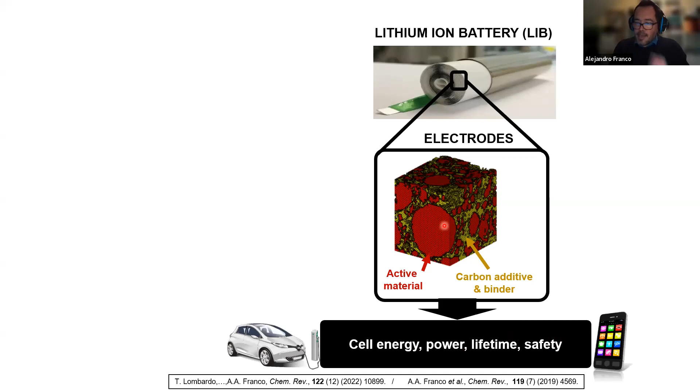We should highlight here that the electrode microstructure is strongly determined by the manufacturing process of the electrodes and of the cells. And the manufacturing process of the electrodes and cells is very complex because it involves multiple steps and multiple parameters, which are very difficult to tune, right?

And the consequence of this complexity is that we used to face high trial and high scrap rates, right? Which are actually around 5% for battery production and 30% in prototyping, when we are intending to prototype lithium-ion battery cells before going to production. And this is because usually this battery manufacturing process is optimized based on trial and error approaches, which of course are very time consuming and very costly, right?

This is why the concept of digital twin is emerging very strongly, in particular here in Europe since some years. And the idea here is having digital twin working hand in hand with the real machines manufacturing the lithium-ion battery electrodes and cells. So this digital twin is a digital copy, it's a copy in the computer of the real process. And the idea is that we have sensors in the real machines fabricating electrodes and cells, collecting data, for instance, measuring the thickness of the electrode being produced.

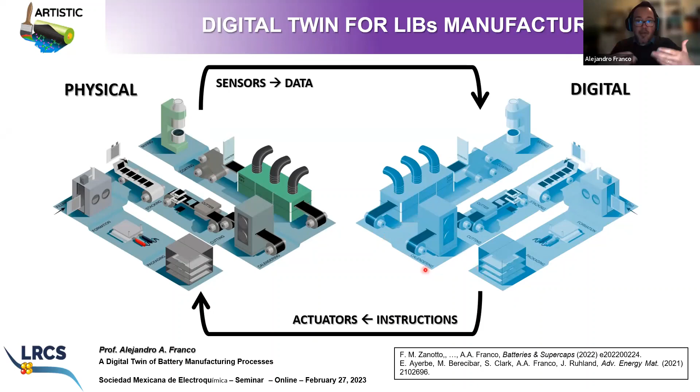This data is being sent into the digital twin where the data is being processed. And then instructions are being provided via actuators to the machines in order to allow them to fine-tune the parameters in an autonomous way and to produce electrodes with the desired thickness or the desired quality, right? In order to avoid, for instance, the formation of cracks upon the drying of the slurry, leading to the formation of electrode. So the idea then is having this digital twin working hand in hand with this real manufacturing process.

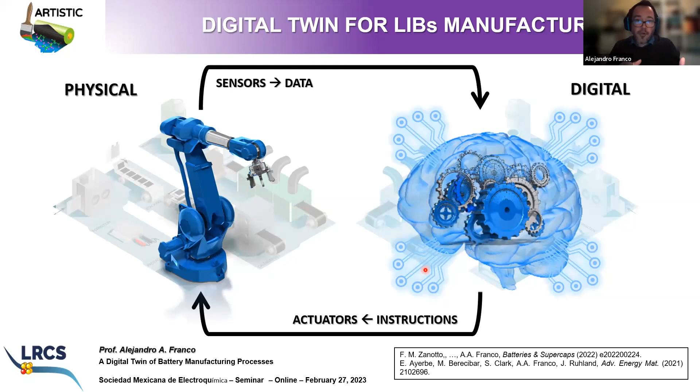So it's basically like if the real manufacturing machines are robots and the digital twin is the brain of these robots, right? So in the context of the development of a digital twin, we could wonder if a digital twin then is a kind of real copy, actual copy or detailed copy of the real machines that we have in a prototyping line or in a production line of lithium-ion battery cells. We could imagine doing so. We could imagine programming in the computer a 3D representation which looks very similar to the real machine geometry, functionalities, and so on and so forth.

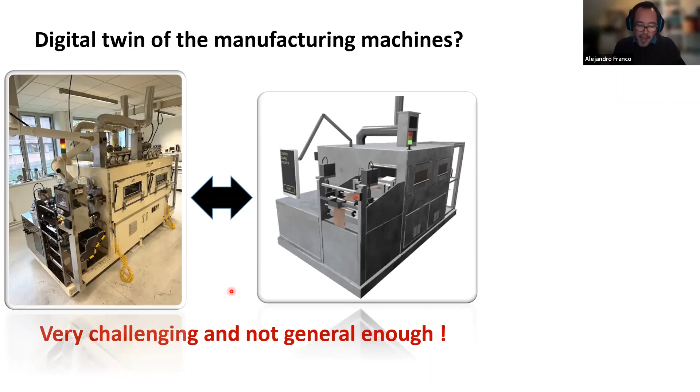Well, this kind of approach is very challenging and is not generic because, first of all, to describe in an extremely similar way a real machine using a computer, it's probably impossible because in a machine there are a lot of details going on. And in other words, it's very challenging because the approach is not generic, because you can imagine that we have different machine providers depending on the different labs, depending on the battery producers, and so on and so forth. This is why in the context of my research, we are developing machine agnostic process models.

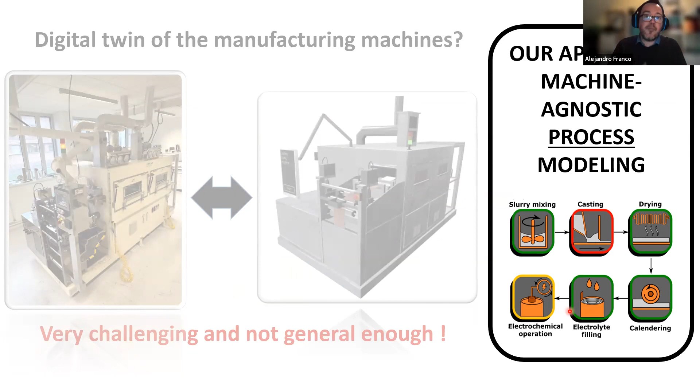So we are developing models which are in the brain of this digital twin, which are able to predict how manufacturing parameters all along the manufacturing process are going to impact the electrode microstructure and the cell properties in terms, for instance, of performance, right? So what we are doing in my group is modeling of the manufacturing process and not modeling of the machines producing the electrodes, producing the cells, okay? And we are doing this work in the context of the ARTISTIC project that I introduced at the very beginning. I was introduced by Luis.

And in this project, what we are doing is we are developing two types of models, which are actually the brain of the digital twin. So one type of models is this so-called physics-based process modeling, where we are describing the physics going on all along each step of the manufacturing process and dealing with the formation of electrodes and dealing with the performance of the cell. And also we are developing machine learning models, which are very useful to unravel correlations between electrode properties and manufacturing parameters. And we are feeding into these models experimental data being collected in the pilot line that we have in our laboratory.

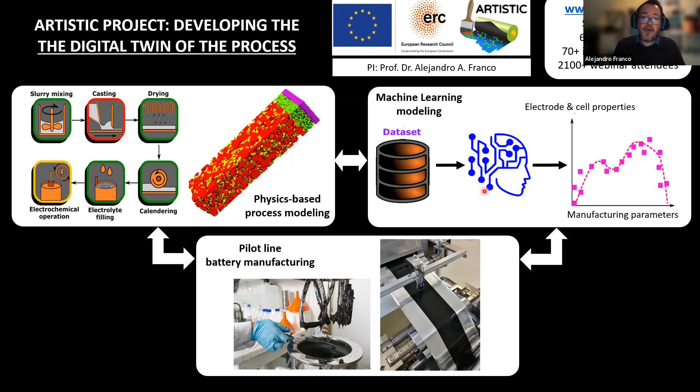So we have a pilot line mimicking how we manufacture lithium-ion battery cells in industry at a reduced scale, right? Thanks to this pilot line, we can generate a lot of data about the influence of manufacturing parameters on electrode and cell properties. And then we use this data in order to validate the physics-based models, but also in order to feed with data the machine learning pipelines revealing correlations between manufacturing parameters and electrode and cell properties.

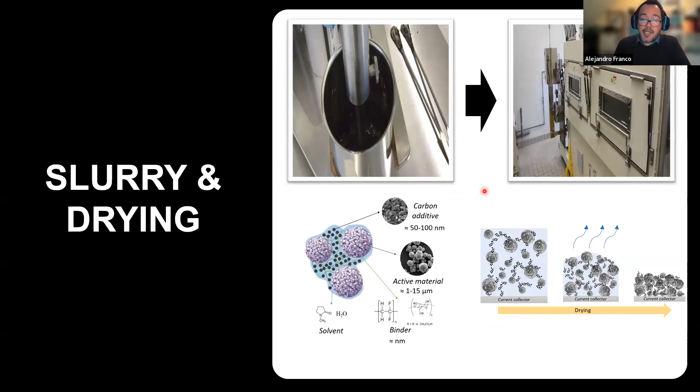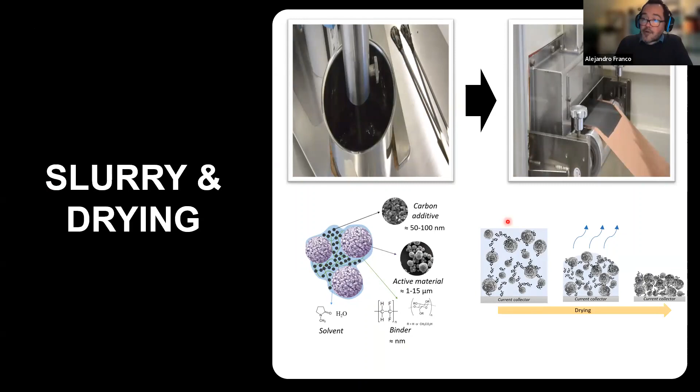I'm going to show you examples of what we are doing for each of the steps of the manufacturing process. And the very first step is the electrode slurry and the drying of this slurry, which is going to deal with the formation of the electrode, right? When you pass the slurry through the oven. So in order to model the slurry by using the physics-based approach, because once again, in the ARTISTIC project, we are developing physics-based models and machine learning models.

So if we speak about the physics-based models, we model with this physics-based approach the slurry in the following way. So we imagine the slurry to be composed of a composition of different particles. Some of these particles will represent the active material particles, NMC 111, for instance, here. Other particles will be fictitious particles representing aggregates of carbon additive particles, binder and solvent. And then we are going to describe interaction forces between these different types of particles.

These forces can be attractive or repulsive, or we can consider both, having at the same time attractive and repulsive forces. Then we implement the mathematical expressions of these forces into Newton equations, and we solve, in a classical MD-like, molecular dynamics-like framework, in order to calculate the acceleration of these particles, and then by integrating the acceleration, we can calculate the speed and the position of the particles.

And by tracking the evolution of the energy, when you describe the interaction between these particles in this simulated slurry, you will be able at the end to converge to a global energy minimum, which will actually correspond to the equilibrium state of the slurry, which will represent the digital twin of the slurry in 3D. This digital twin of the slurry is in periodic boundary conditions.

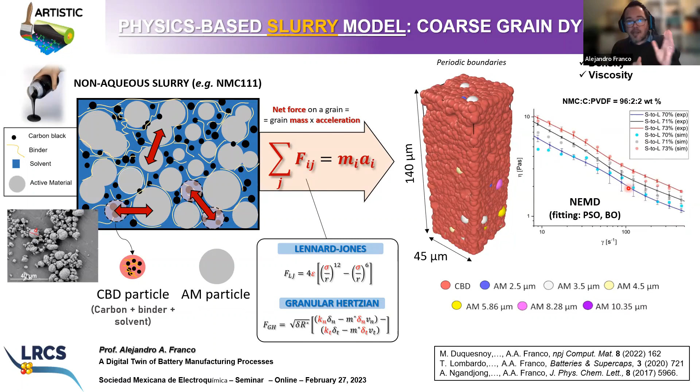In order to do so, we fit the density values that we calculate with experimental ones, and we also fit the viscosity values that we calculate for different shear rates with experimental ones for different slurry formulations, different solid contents. And in order to fit the parameters, we adopt a combination of optimization techniques, combining in particular two techniques, particle swarm optimization and Bayesian optimization, but also machine learning.

We published last year a paper where we report a machine learning pipeline which is able to predict the results of these physics-based simulations in terms of viscosity and density before the physics-based simulation finishes. In such a way, we can predict the results of the physics-based simulation without the need of running it until the end, knowing that a physics-based simulation like this can be very time-consuming.

Thanks to this machine learning model, we can accelerate the optimization of the parameters that we need to put in the force field in order to match correctly the viscosity and the density values from experiments. I'm not going to discuss this slide in more detail, which is very technical. It relates a lot to machine learning in particular. So if you have questions, of course, I will be happy to discuss this in more detail.

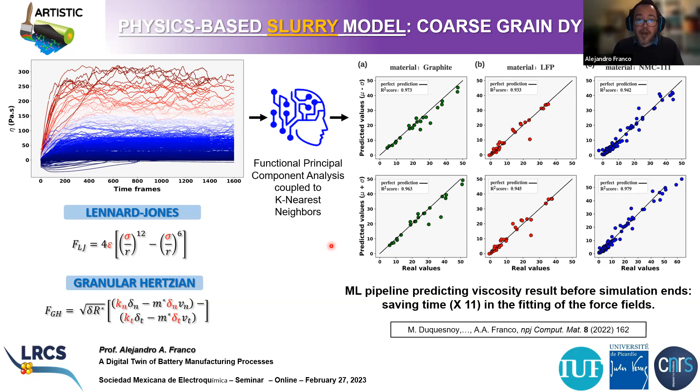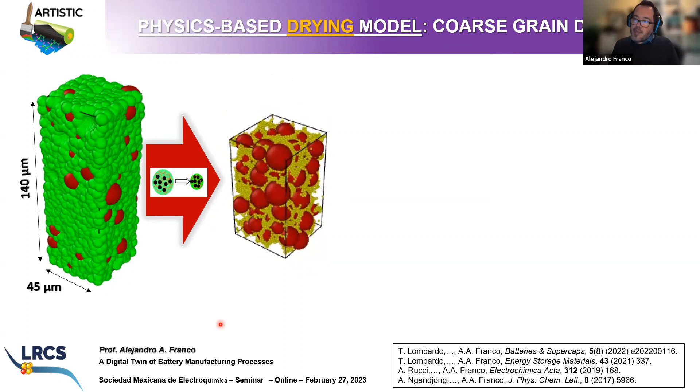These green particles representing the CBD are now represented in yellow. Then we run the MD-like, molecular dynamics-like framework again by solving Newton equations, once again describing the interaction forces between the particles, and we converge to a new equilibrium state, which will represent the dry electrode microstructure, where you see in yellow the carbon binder domain, in this case not containing any more solvent. It contains just carbon additive particles and binder, and you see in red the active material particles with different sizes.

This virtual representation of the electrode, the digital twin of the dry electrode, can be characterized in the computer in terms of properties that we can measure at the experimental level. For instance, the porosity of the electrode and the tortuosity factor of the electrode. But we can also characterize other properties such as the electronic conductivity of the electrode, and so on and so forth.

So I would like to highlight, here you see this paper, Journal of Physical Chemistry Letters in 2017. This is a paper that we jointly published with Jorge Vázquez Arenas, who is present in the audience and who is organizing this event. We hosted Jorge for 3 months, and we had a very nice collaboration. He was in charge of modeling the electrochemical performance of this electrode being generated by this simulator of the manufacturing process.

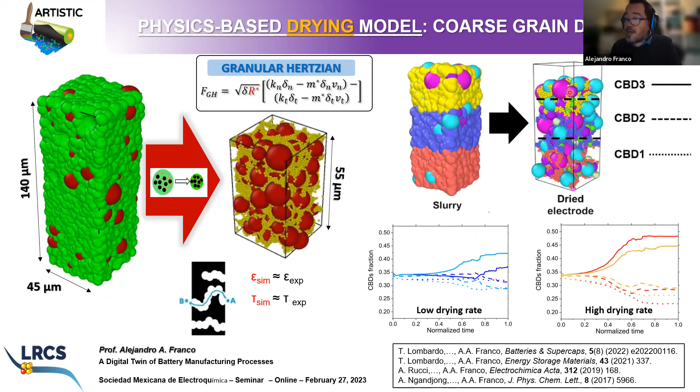And since then, we have also had a lot of progress in the methodology. One of these is that now we are able to simulate the impact of the drying rate on the electrode microstructure in order to capture the influence of drying rate on the CBD migration phenomenon, which is widely known in battery manufacturing. When you dry the slurry too fast, what you observe experimentally is a lot of carbon binder domain going on top of the electrode. This will be a problem because you will have an isolating layer between the electrode and the separator that I'm going to put on top of this electrode.

Here, the simulations are performed by shrinking the CBD at different rates, depending on whether you are talking about the CBD near the current collector or the CBD in contact with air. CBD here stands, at the slurry phase, for carbon binder containing a solvent domain. By playing with the rates of shrinkage of these CBDs at different zones, you can converge to electrode microstructures with carbon binder domain with different repartitions along the electrode thickness. In particular, if you apply high drying rates, you will start to see gradients of CBD content along the electrode thickness, in good agreement with what we find at the experimental level.

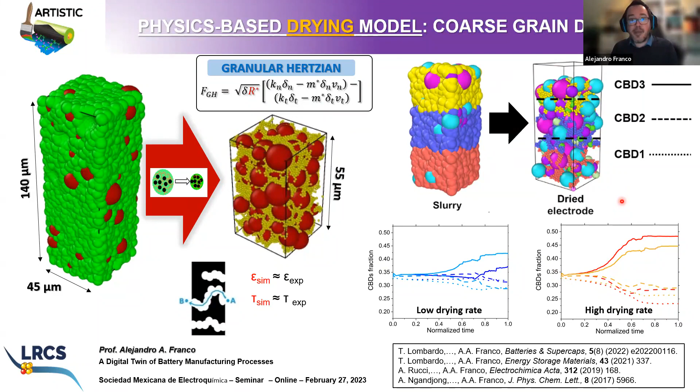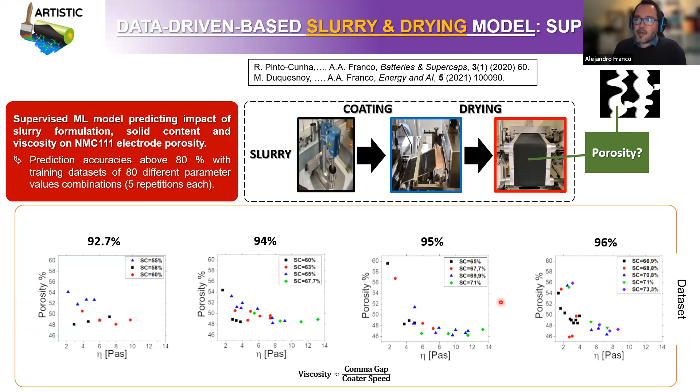Here you see how the porosity of the electrode depends on the viscosity, the solid content, and the slurry formulation. This is the weight percentage of NMC 111 in the slurry. You see that this collection of points is very scattered. It's very difficult from this graph to unravel any correlation between these 3 input variables and the output variable, the porosity of the electrode. If you apply supervised machine learning, in particular a technique called support vector machine, you can transform this scattered collection of points into something more understandable by humans: phase diagrams, exactly like in crystallography, but here for manufacturing processes.

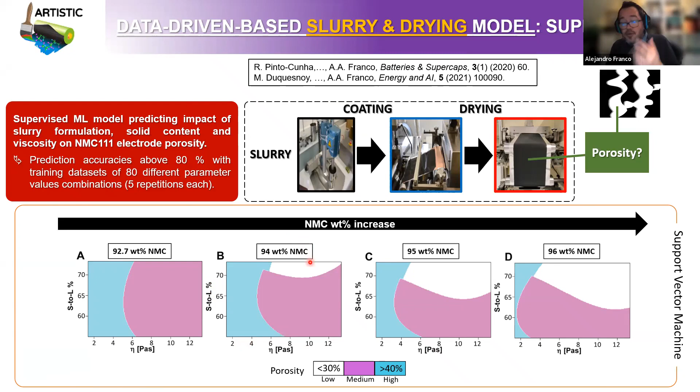Once again, this type of graph is very useful, in particular for technicians and engineers working in pilot lines and prototyping lines of batteries, because very quickly, thanks to these phase diagrams, they can decide which slurry viscosity they need, connected to the coating speed and the comma gap in the coater, and which solid content and formulation they need in the slurry to get electrodes with the desired porosity.

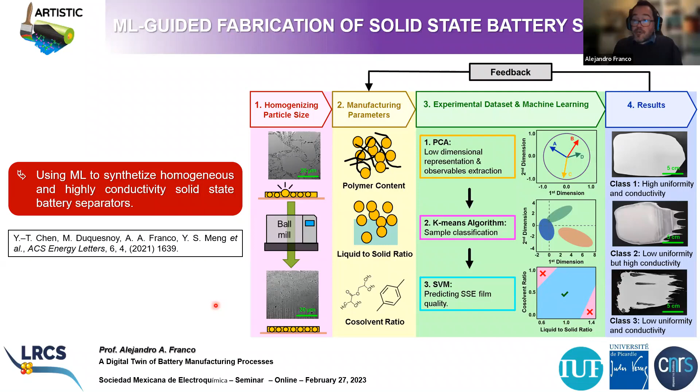Let me move now forward to the next step of the manufacturing process of lithium-ion batteries. Here I'm coming back to lithium-ion batteries. And the next step is, of course, the calendaring. The calendaring consists of pressing the electrodes in order to improve the electronic contact between the particles. We need to press the electrodes to improve electronic contact, but at the same time, we need to avoid the pores inside the electrodes being fully collapsed, because if these pores become fully collapsed, then the liquid electrolyte that you need in order to exchange lithium ions properly between the two electrodes is not going to wet the porosity properly.

This is a very complex process step because in a calendaring machine, you can control basically three types of parameters. You can control the gap between the rolls pressing the electrodes. This gap is related to the pressure that you apply to the electrodes. You can control the speed of the rolls, and you can also control the temperature of the rolls. These three parameters are going to impact the final electrode microstructure upon calendaring.

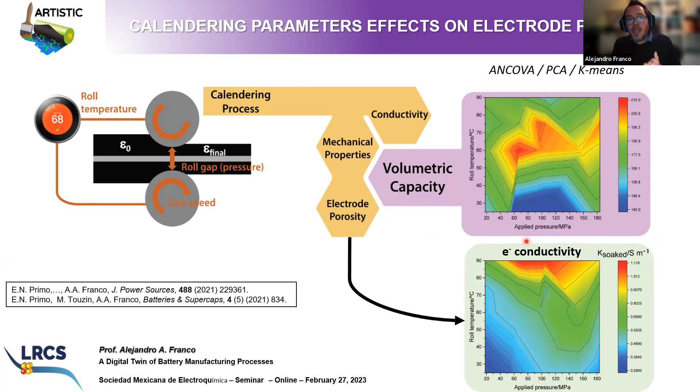And you see the influence of the same parameters on the electronic conductivity of these electrodes. There is also another axis, which is the roll speed, which is not represented here in this graph. But this is just to show you how complex the impact of these manufacturing parameters of the calendaring step can be on the final electrode properties that you get upon calendaring.

And you see that when you compress the electrode, there is a plastic deformation, but also there is a little bit of elastic recovery. This is a phenomenon called the spring back phenomenon in the battery manufacturing field, which is widely known, in particular in industry, and it's very difficult to optimize. The model is able to predict the influence of calendaring on the plastic deformation, and is also able to predict the influence of calendaring on the elastic recovery or spring back phenomenon. The microstructure of the electrode being used for simulating this calendaring step is the one arising from the drying simulator. You see all these models are connected sequentially.

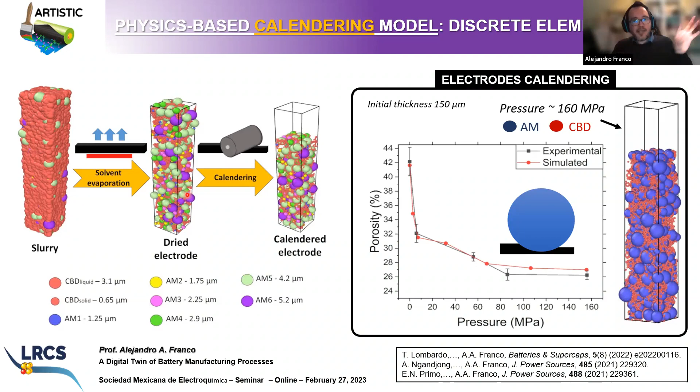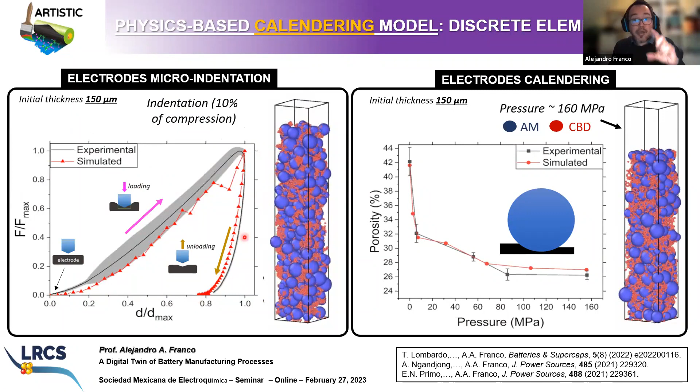And another point which is very important to highlight is that the parameters in these models are being determined by fitting the microindentation characterizations that we have performed in collaboration with the University of Lille, which is near the city of Amiens, the city where my lab is located. In this microindentation experiment, you basically use an indenter to go into an electrode, and then you measure the resistive force of the electrode towards this indenter.

And then you can simulate this by using this method, and then by comparing results from the model with the experiment, you can calibrate the parameters that you need to put in the interaction forces describing the interaction between these particles upon calendaring.

And also we have calibrated these parameters simultaneously to compaction curves. In a compaction curve, we represent the influence of the calendaring pressure on the electrode porosity. And you see here also a very good fitting with the experimental compaction curve.

We have recently extended this model. This is a paper published very recently this year, to the case of having non-spherical active material particles. Because probably you noticed that all the simulations I showed you so far with the physics-based approach are considering active material particles as spheres, right?

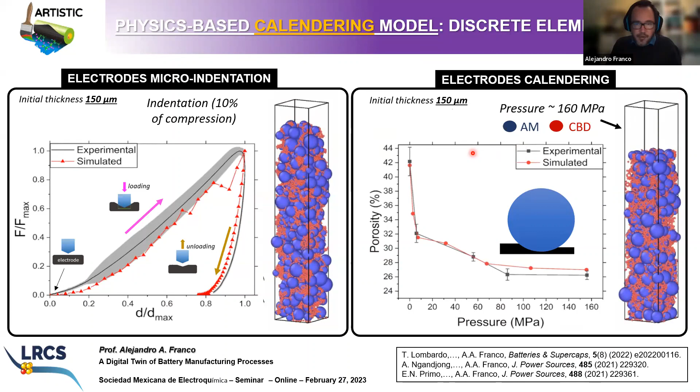This could be a quite good approximation for active materials such as NMC111. But if you start to look in detail at the particle morphologies, you don't have spheres, right? You have things like that, which could be represented eventually as spheres, but they are not really spheres. So in order to be able to simulate systems where the hypothesis of the spherical particle is very far away from reality,

we have characterized electrode microstructures before and after calendaring using micro-CT, micro-computed tomography. In such a way, we can extract families of particle morphologies. And then in each of these particle morphologies, we embed a collection of spherical primary particles, reproducing the overall morphology of a secondary particle. And then we apply the same MD-like framework I described before.

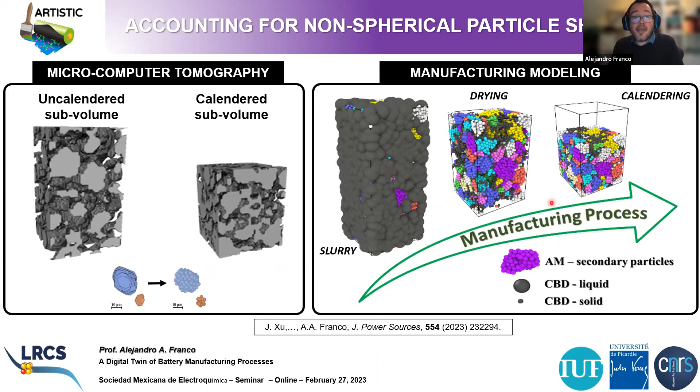That means we account for interaction forces between primary particles with different magnitudes for the primary particles belonging to the same secondary particle versus the case where these primary particles belong to different secondary particles. In such a way, we can simulate the entire manufacturing process, the slurry, the drying, the calendaring, by using non-spherical particles.

And here I'm going to show you a couple of examples of what you can get with these more sophisticated models. For instance, you can predict the influence of calendaring on the electrode microstructure, and you can account for the deformation of the active material particles because of the calendaring process parameters, the compression degree, the temperature, and so on.

This is a paper that is right now under preparation and hopefully will come out soon. It's an extension of this model, which is able to predict under which calendaring conditions the active material particles are going to crack. And this is also a problem in terms of manufacturing electrodes in industry: how to optimize the calendaring process in a way that you have good electronic percolation between the particles, you don't collapse the pores, and at the same time you don't crack the active material particles.

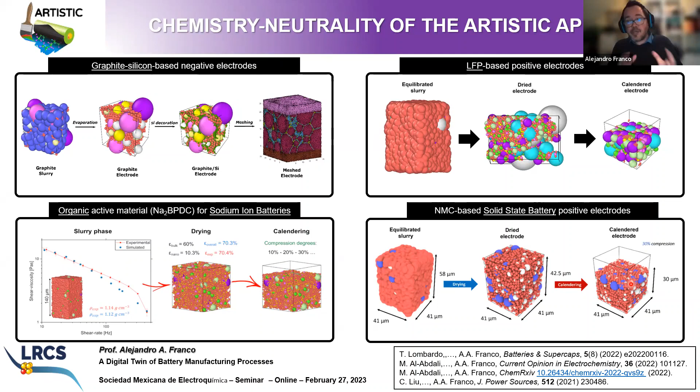You can address also the calendering by using machine learning, okay? And here I'm going to illustrate an example of application. It's a collection of papers that we published in 2020-2021. It's in particular based on the SISSO method, which is a method I really recommend. It's actually a method which is trained with data, right? And which derives algebraic equations relating input variables with output variables, okay?

I think it's a very cool method to derive formulas, right? Mathematical formulas that you can then apply for predicting, for instance, the influence of calendering pressure and calendering temperature on the final electrode porosity, right? Here you see a demonstration of this application in the context of calendering.

We have first built a data set where you have as an output the porosity of the electrode after calendering, and as an input you have the formulation of the electrode, which is the active material content in weight percentage, the porosity of the electrode before calendering, the thickness of the electrode before calendering, and the calendering pressure. These are the four input variables, while the output variable is the porosity of the electrode.

Thanks to this data set, we have derived a correlation function, okay? This is a kind of fitting, relating the porosity of the electrode as a function of these four input variables. And then we have used this correlation function in order to generate a lot of electrode microstructures in 3D. So we have generated a bit more than 4,500 electrodes. This generation of electrodes was performed by using a stochastic approach.

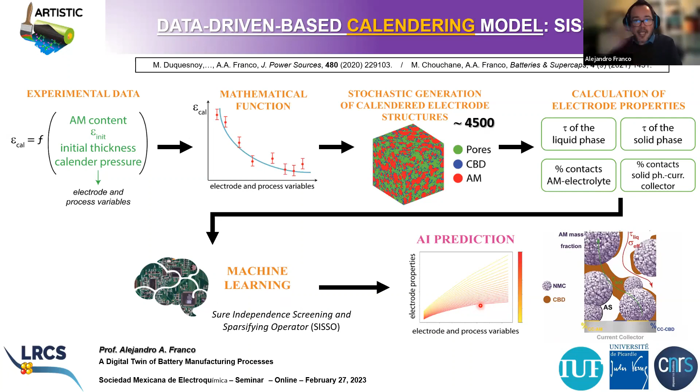Based on this data set, where you have as an input these four parameters and as an output all the collection of parameters that you can imagine for an electrode microstructure, we have trained this SISSO-based machine learning model in order to perform regression, okay, in order to predict numbers. And here I'm going to show you an example of what you can get with this technique.

You can predict the influence of calendering pressure, the initial porosity of the electrode, and the formulation of the electrode, each curve here with a different color corresponds to a different formulation, on the tortuosity factor that you will get in your electrode upon calendering. You see that when you increase the calendering pressure, the tortuosity factor increases in these four cases. This is expected because the electrode is becoming more and more compact, the pore network is becoming more and more tortuous. But the nice thing with this method is that you can quantify the degree of impact.

And you can also see that the degree of impact of the calendering pressure on the final tortuosity of the electrode depends on the initial porosity of the electrode, I mean the porosity the electrode has before the calendering, and also depends on the electrode formulation, right? And I believe, once again, that this kind of result arising from machine learning can be very useful for guiding technicians and engineers working in prototyping lines and in pilot lines before the production of lithium-ion battery cells.

With these techniques, you can also perform some correlation analysis, and here you can build this kind of graph that I believe is very, very useful and interesting. Here you see the influence of these 4 input parameters that we have explored in this study, and here you see the output parameters, right?

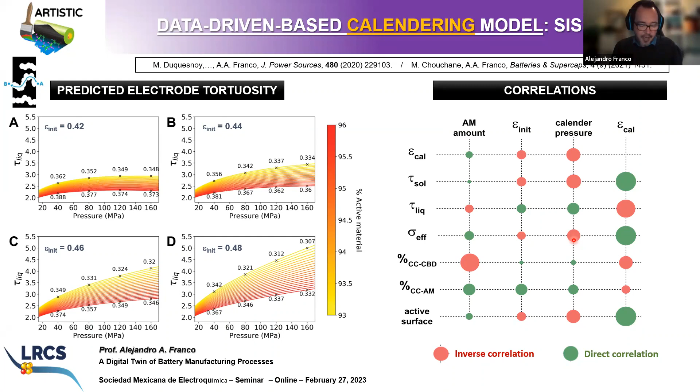Once again, this kind of graph can be very useful also for guidance, right? Because very quickly you can already have an overview of how the input parameters impact the outputs. And I believe this can be transferred to any kind of problem, in particular in electrochemistry, beyond the field of lithium-ion batteries.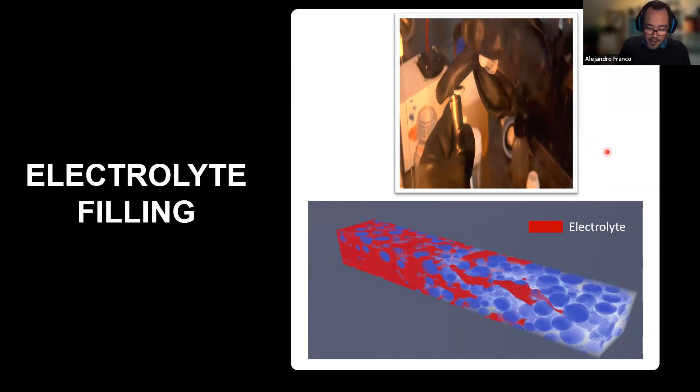The next step in the manufacturing process simulation is considering the electrolyte filling, okay? So you see here a cylindrical lithium-ion battery cell, as you have in the Tesla cars, being filled with a liquid electrolyte in a glove box. This is a process which is very difficult actually to optimize at experimental level, because, as we will see in a minute, it's a very complex process, right?

Here you see simulations that we have performed by using the lattice-Boltzmann method to predict the trajectory of the electrolyte when it's infiltrating electrodes, an uncalendered electrode and a calendered electrode. I will play the video again: you see how fast is the infiltration of an uncalendered electrode, and how slow is the infiltration by liquid electrolyte of a calendered electrode.

The reason is that a calendered electrode has higher tortuosity factors. Porosity is lower, tortuosity factor is higher. Therefore, there is a more intricate path for the liquid electrolyte to go into the pore network. While for an uncalendered electrode, porosity is higher, tortuosity factor is lower, so it's easier for the liquid electrolyte to go and fill the pores, right?

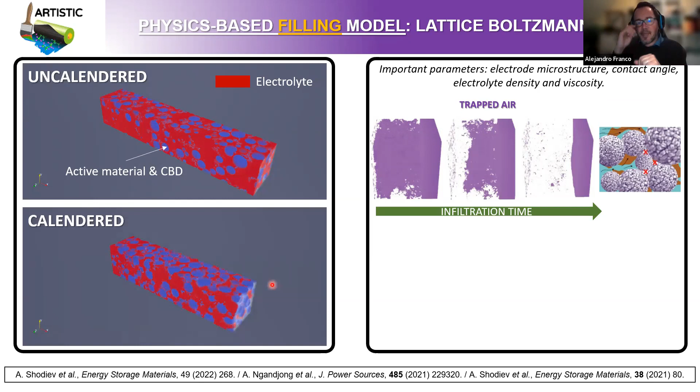So this is highlighting that there is a trade-off between the manufacturing process step calendering and the step electrolyte infiltration, because in the calendering, you need to compress the electrode in order to improve the electronic contact between the particles. But in electrolyte infiltration, it would be better to have high porosity, right? But if you compress the electrode, you will have lower porosity, you see? So it's very important to optimize both steps by considering both of them.

That's why this kind of modeling workflow, where we intend to couple different model tools sequentially, is very useful, because you can reveal this kind of correlations between different process steps. Here you see results from this lattice-Boltzmann method simulation. This is the predicted spatial distribution of trapped air in the electrode porosity. You see here a lot of air bubbles which remain inside the electrode volume after the electrolyte infiltration.

And this is, of course, problematic because if you have air instead of liquid electrolyte, then your active material is not going to be fully active upon lithiation or delithiation, which is an electrochemical process. You need lithium ions to arrive to the surface of the active material. If you have air, the lithium ion is not going to arrive to the active material, and then you will lose performance for your lithium-ion battery cell. You will lose energy density, you will lose power density, right?

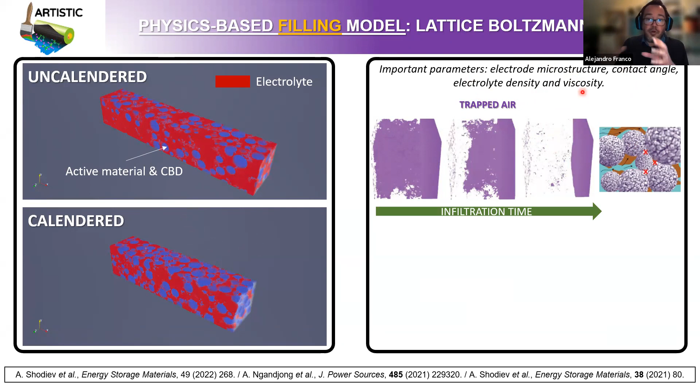This phenomenon is strongly dependent on the electrode microstructure, as we saw here, but also strongly dependent on the contact angle between the liquid electrolyte and the electrode. It's also dependent on the electrolyte density and the electrolyte viscosity. And these properties can be controlled by playing with the chemical composition of the electrolyte.

Okay. Here you see a result of simulation showing how heterogeneous the infiltration by liquid electrolyte of a cell sandwich can be. This is a simulation also in 3D, but here I'm showing a side view. In the anode, you have a graphite-based electrode.

You have an NMC111-based electrode in the cathode side. In the middle, you have a separator with a microstructure arising from tomography characterization. And these electrode microstructures were generated stochastically. And you see here how heterogeneous the infiltration process is if you put a drop of electrolyte on top, right? And this is because the porosities and the tortuosity factors of these three layers are different. This explains why it's so heterogeneous.

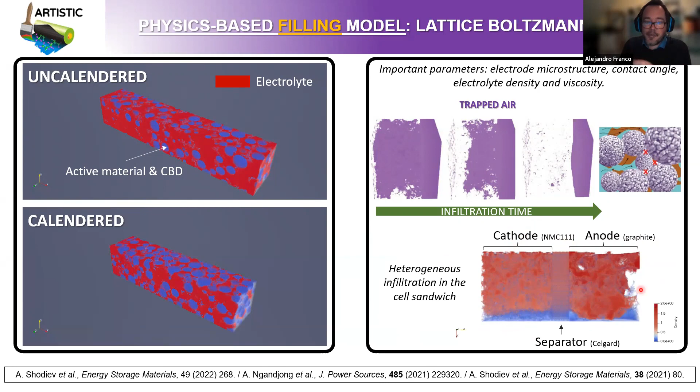And this also explains why it's so difficult to optimize this electrolyte infiltration process in industry, why it's so time consuming. The lattice-Boltzmann method that we have used to explore this infiltration process with physics-based simulations is computationally costly. To simulate the infiltration of a single electrode, it can take you 1 to 2 days of simulation time, depending also on the computational power that you have.

This is why we have derived, by using machine learning, a surrogate version of this lattice-Boltzmann method, which has the advantage of being able to simulate the infiltration process of electrodes in 3D by the liquid electrolyte in a few seconds instead of a couple of days. What we use as a training data set is the results arising from the lattice-Boltzmann method. And we have actually defined different descriptors.

For instance, the final saturation of each of the pores in a given microstructure, the time that the pore takes to be fully filled or partially filled, and so on. With this data set, we have trained a multi-layer perceptron model, which is nothing more than a kind of neural network model. Thanks to this model, we see very good prediction of the saturation curves calculated by the lattice-Boltzmann method

for different applied pressures. Also, thanks to this machine learning model, we can reconstruct in 3D the trajectory of the liquid electrolyte in the electrode volume, in good agreement with the lattice-Boltzmann method. So we believe this is very interesting because with much reduced computational power, you can predict the same results. And this paves the way towards high throughput screening of the influence of electrolyte properties and electrode microstructures on the speed and ease of the infiltration process.

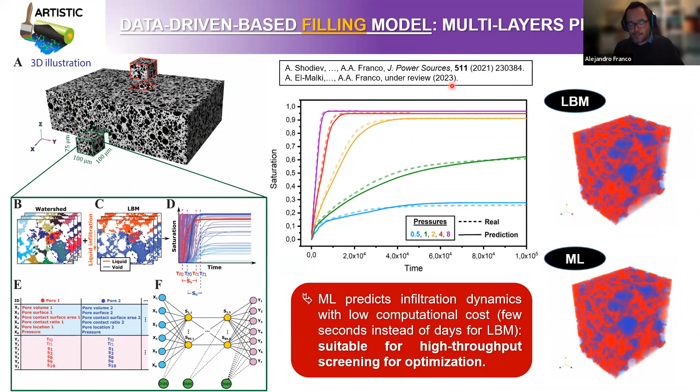This is a paper that we initially published in 2021, describing this method. And now we have a paper under review where we demonstrate the use of this method for high throughput screening of electrolyte chemistries and electrode microstructures in their ability to infiltrate the electrodes by the liquid electrolyte. Hopefully this paper will come out soon.

The last step to digitalize the battery manufacturing process is the simulation of the electrode and cell operation. Once we get these digital twins of the electrodes and the cells, we would like to know how they are going to behave when applied, for instance, in a mobile phone or in an electric car, which in my projects is more related to electric cars than to mobile phones.

In order to do so, we apply a technique called the finite element method. This is a model that we co-developed with Jorge Vázquez Arenas, as I mentioned before, in 2017, and then we improved it a lot with new functionalities. In particular, we improved it by considering explicitly the spatial location of the carbon binder domain in the electrode volume.

By meshing the electrode microstructures arising from the manufacturing simulation and implementing the physics going on when this electrode is operating in a lithium-ion battery cell being discharged and charged, we are able to predict the lithiation and delithiation dynamics in the 3D volumes, as a function of the C rate, which is related to the current density applied to the battery, and as a function of the temperature and other operation parameters.

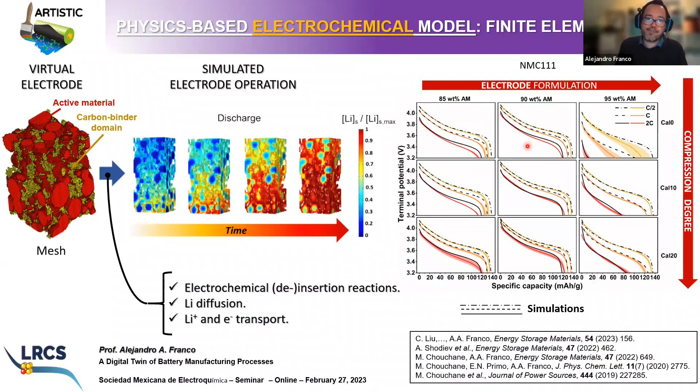Last but not least, we can wonder, can we use these tools for optimizing the manufacturing process? Because here I describe tools to predict the influence of manufacturing process on electrode and cell properties, but can we use these tools to predict which manufacturing parameters we need to adopt in order to have an optimized electrode, right? Well, the answer is yes, and this is also a paper that we published very recently this year in Energy Storage Materials. And here I'm showing this with an example.

We have actually performed design of synthetic experiments. That means that we are performing simulations by using the ARTISTIC physics-based modeling framework of the manufacturing process of NMC 111 electrodes by simulating the slurry, drying, and calendering for different ranges of formulations, solid contents, and compression degrees. So here we are playing with the formulation, solid content in slurry, and with the calendering degree in the calendering step, keeping constant the conditions for the drying step.

We have produced, based on that, a lot of electrodes that we have characterized in terms of properties such as conductivity, tortuosity, porosity, thickness, and so on. And then we have derived a machine learning model able to predict how these manufacturing parameter values are going to impact the final electrode properties upon manufacturing. This machine learning model has the advantage compared to the physics-based modeling that it is less computationally costly. In a few seconds, you can get your answer.

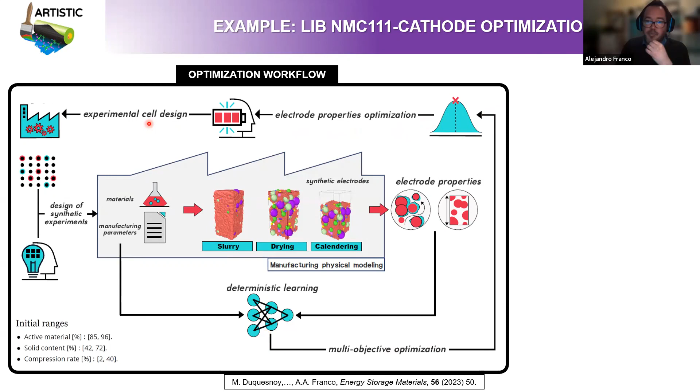And then we embed it in a multi-objective optimization algorithm based on Bayesian optimization technique in order to predict which are the parameters you need to adopt in the manufacturing process in order to reach electrodes with optimized properties. This is a detail of how we are actually designing these synthetic experiments. We use a technique called Sobol sequences. That means that these synthetic experimental points are taken randomly between these 3 variables that we have explored here: solid content of the slurry, formulation of the slurry, and compression degree upon calendering.

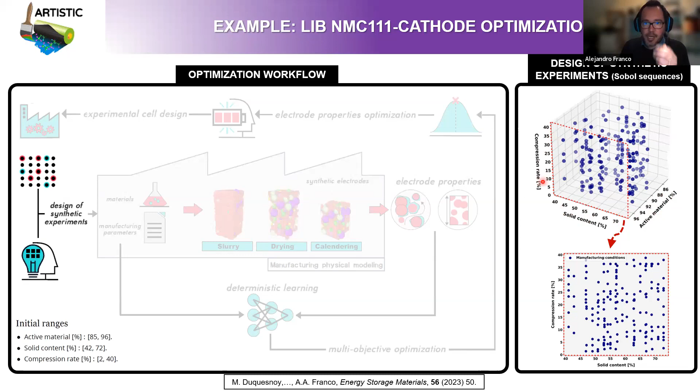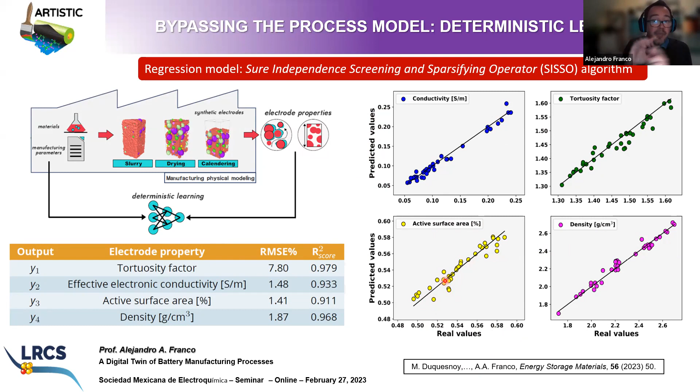These graphs are actually representing the same thing. Predicted values are the values predicted by the machine learning, and real values are the values predicted by the physics-based model. And the idea here is being as close as possible to this 45-degree line. If you are matching perfectly this line, that means that you have a machine learning model with accuracy 100%.

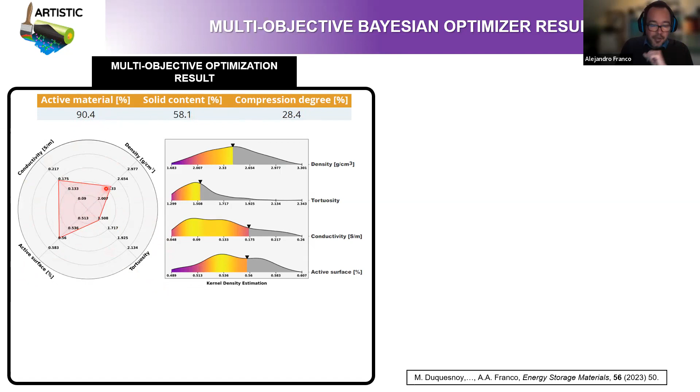And if you enter these manufacturing parameters in the ARTISTIC manufacturing simulator, and then you characterize the electrode properties of the resulting virtual electrode, you will realize that these properties match very well with the predictions of the Bayesian optimizer. So this is a way of validating the prediction of the Bayesian optimizer. And this is something that we have also performed at the experimental level. So we have checked that this electrode can be made at the experimental level by entering these manufacturing parameters predicted by this Bayesian optimizer.

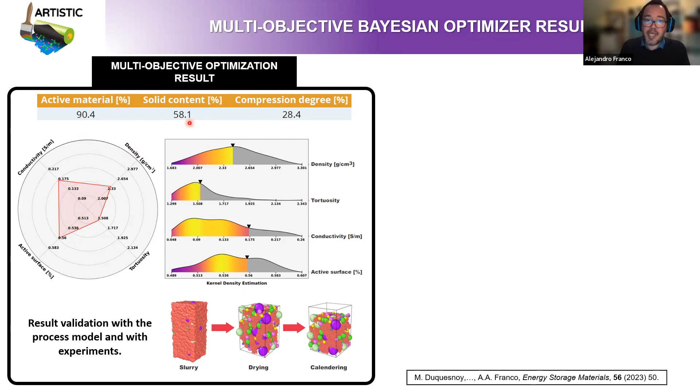and not only one single property, because if you intend to minimize the tortuosity factor of an electrode in order to improve the power density of your cell, maybe you will lose conductivity, right? You will have an electrode with very poor electronic percolation in the electrode volume.

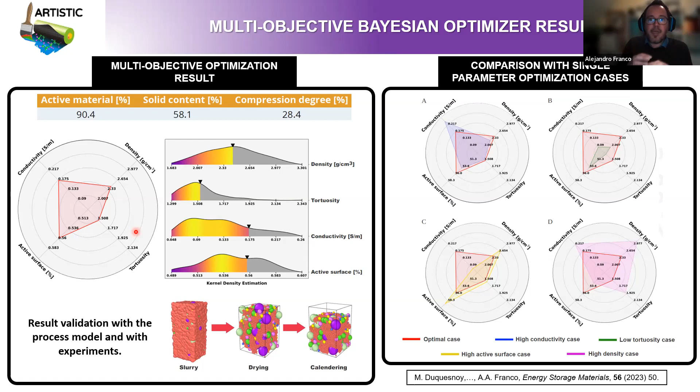So we believe that this is a nice demonstration of how we can use physics-based models combined with machine learning and Bayesian optimization in order to perform inverse design of the manufacturing process of lithium-ion battery electrodes. That means predicting which manufacturing parameters we need to adopt in order to get optimal electrodes.

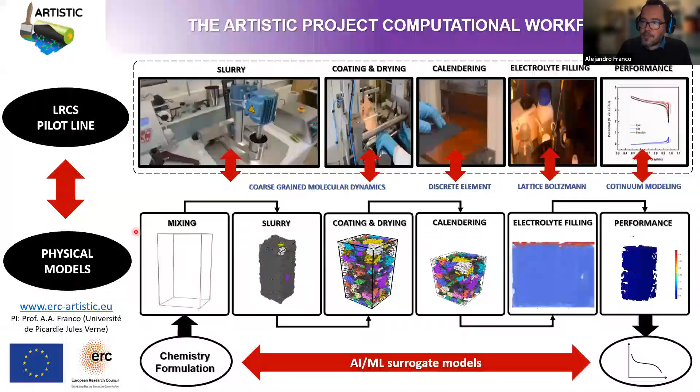Let me conclude now in 2 or 3 minutes. So this is the slide summarizing what I showed you today. We have a collection of physics-based models simulating each step of the manufacturing process, from the mixing, something that I didn't discuss today, but this is a paper coming out as well, until the performance. We have surrogate models based on machine learning, predicting also the influence of manufacturing parameters on electrode and cell properties.

And we feed into these digital workflows data coming from our experimental pilot line, I mean, the pilot line mimicking how we manufacture lithium-ion battery cells in industry.

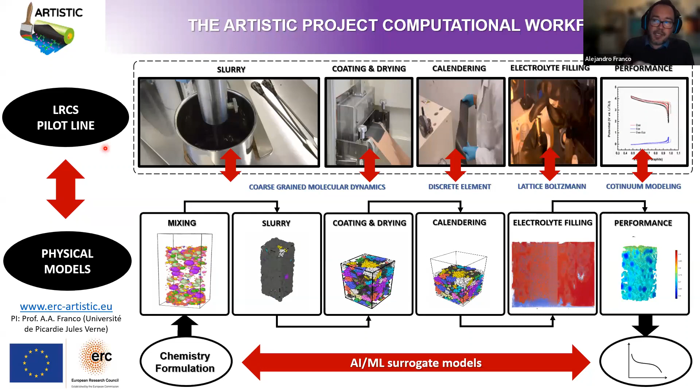So we released a couple of years ago, in 2020 for the first time, an online manufacturing calculator. This is a tool which allows you to simulate the manufacturing process of lithium-ion battery electrodes without having any knowledge about simulations, because we have very nice graphical user interfaces. These graphical user interfaces allow you to play with parameters like in experiments. For instance, the active material particle size distribution, the formulation, the solid content, and so on.

When you choose these parameters, you launch simulations in our HPC facilities. When simulations are obtained, you receive an email with the results. You can download them and use them for your research. But you can also explore the data produced by all the users of this computational portal or online calculator service.

So for now we have integrated here the slurry simulation, the drying, the calendering, and by the end of last year, the simulator of the infiltration process in 3D using the lattice-Boltzmann method. And we have also released some scripts which allow you to predict the influence of manufacturing parameters on electrode properties based on machine learning.

As of this month, we have more than 520 users, 25% from industry. Many of these people connect, explore the functionalities, and download data for their research. Some of them use this tool to perform simulations and then download the results. So you are very welcome to connect, use it, and test it.

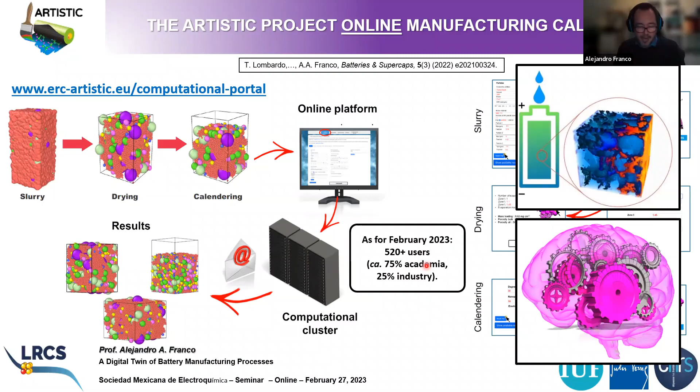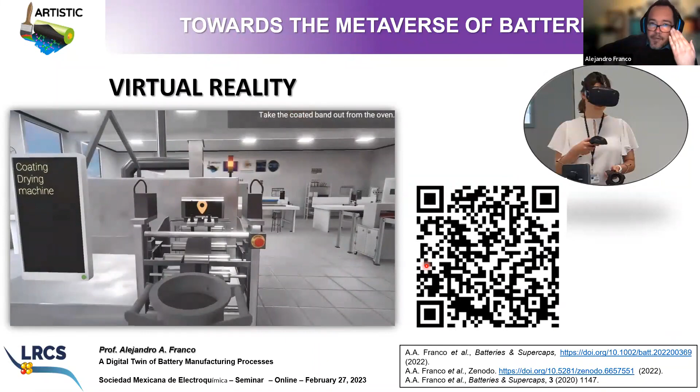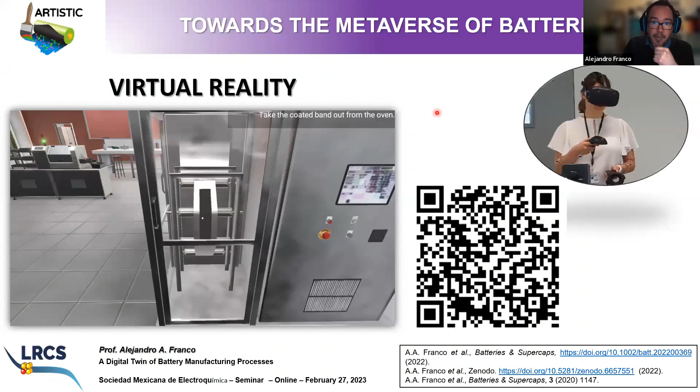Last but not least, we have been working since 2016 on the development of a metaverse for batteries. Here you see one of the latest virtual reality-based tools that we have released. If you scan this QR code, you will be able to use it from any internet browser, using the mouse pad and keyboard of your computer. But we can also use these tools with HTC headsets, where you are really immersed in a virtual reality environment.

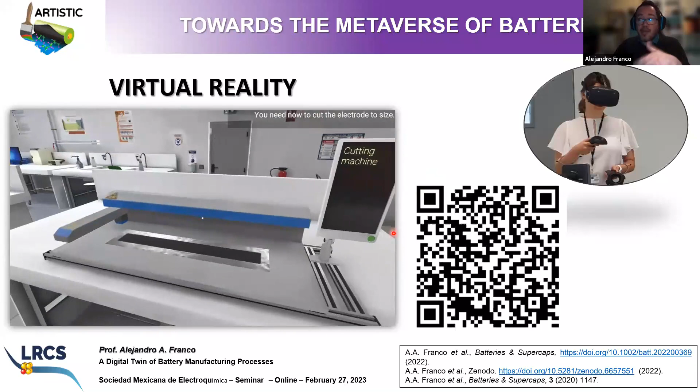This is actually a serious game where you have to interact with the different manufacturing machines that you find in the prototyping line of our lab. So this is really a digital twin of our lab facilities.

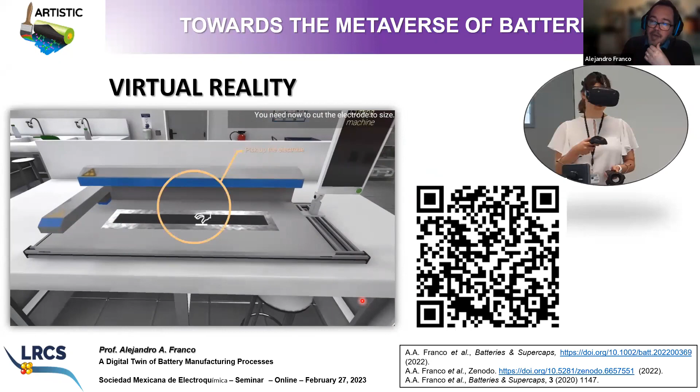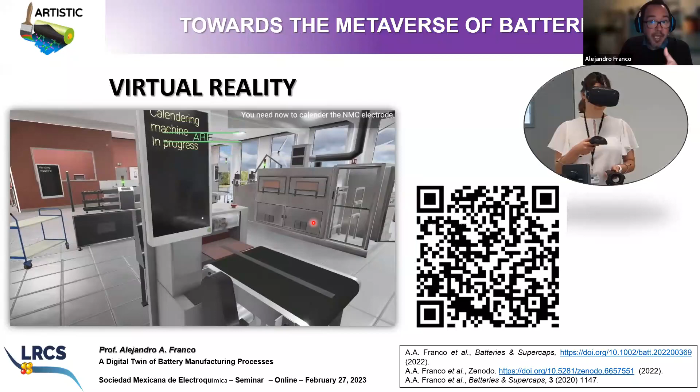This was developed with the purpose of popularizing the science of battery manufacturing, the kind of parameters that you need to play with in each of these manufacturing machines, and also to understand how these parameters influence electrode and cell properties. Because at the end of this game, the game asks you to characterize the electrochemical performance of these virtually manufactured lithium-ion battery cells.

This is a concept that we are working on very strongly right now, and we are soon going to implement a functionality where multiple players from different parts of the world will be able to interact inside the same virtual reality environment to collectively solve battery manufacturing problems.

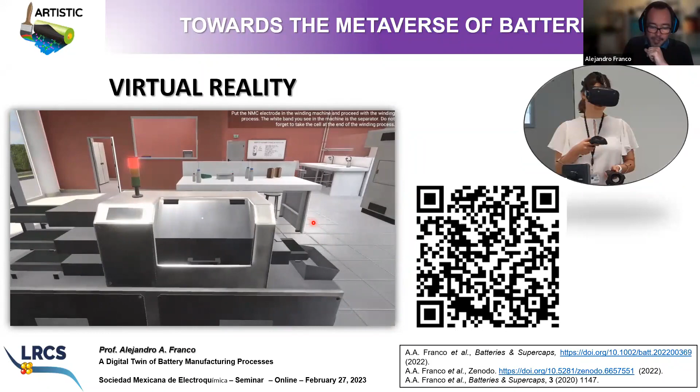We have an offer in collaboration with the French chemistry company Arkema, which is the widest chemistry company in France, on the modeling of the manufacturing process of lithium-ion battery electrodes. And we have 2 PhD positions in collaboration with a research institute in France called IFP New Energies, also on the modeling of the manufacturing process, but this time on sodium-ion batteries and solid-state batteries. If you are interested or you have students who might be interested, please drop me an email. Positions are to start as soon as possible, okay?